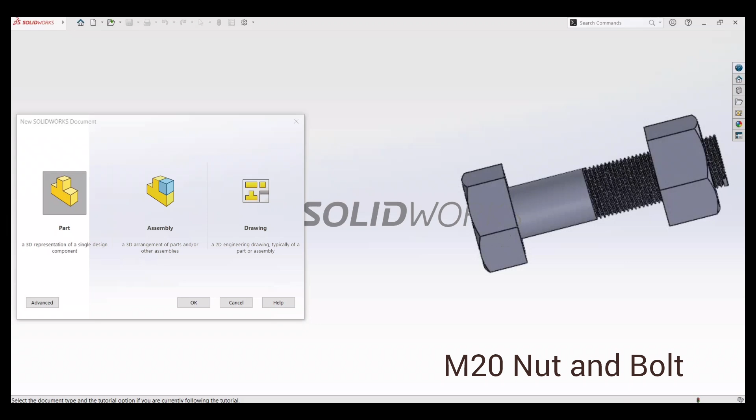Hi everyone. Today we are going to discuss the nut and bolt assembly. For that, we need to open the part drawing. Click on OK.

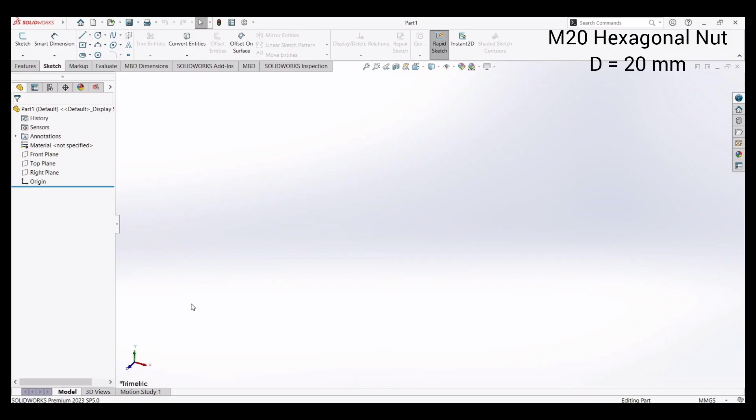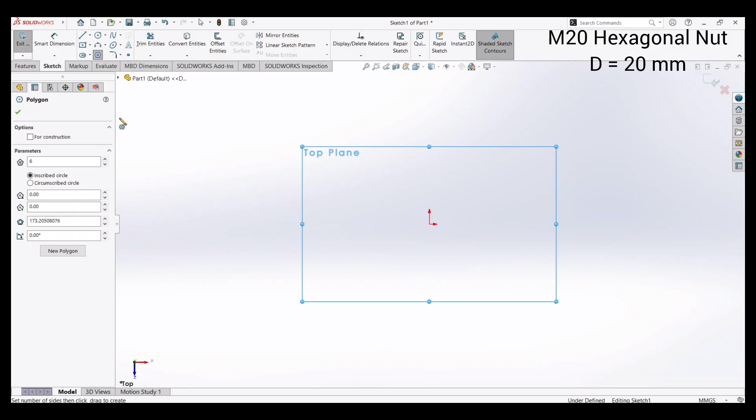Here we are drawing an M20 nut. For that, we need to select the top plane. Then on the basic modeling tools over here, we click on the polygon. Now we go here.

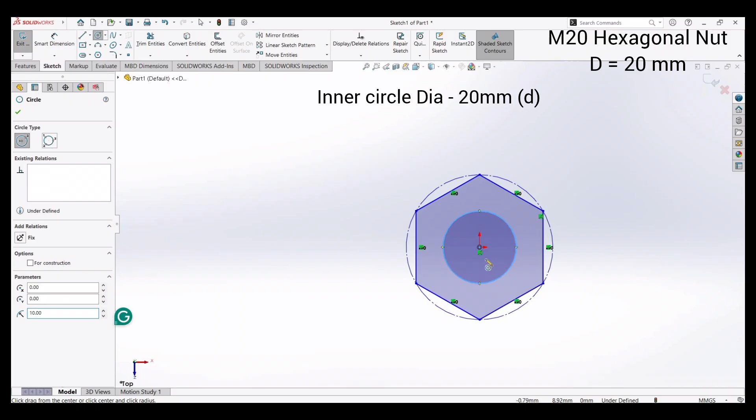We need to click on the circumscribed circle. The circle dia must be 40. We need to draw the circle of dia 20, so the radius will be 10. So this circle dia will be 20.

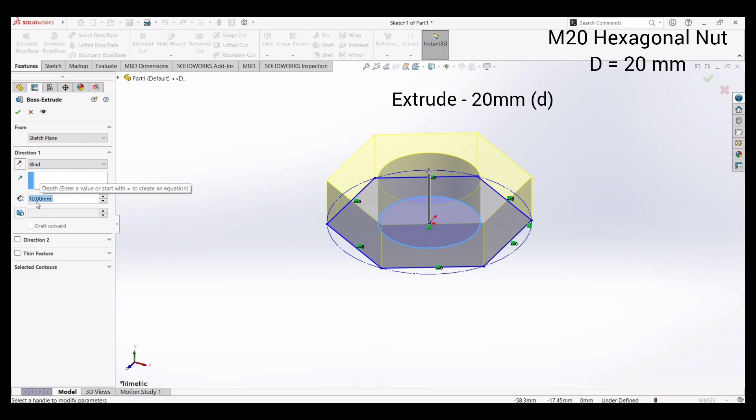Click OK. Then on the basic modeling tools over here, click on the extrude boss base. You can see here, and the value will be 20. Click OK.

So this is the basic drawing. Then we need to chamfer the edges. For that, we need to come to the front plane. Make sure we can see only two faces over here. If we see like this, we need to change to the two faces direction that is available on the front view.

Then using a midpoint line, we draw a line over here. We need to make that angle 330, and we can give the distance 20. Click OK.

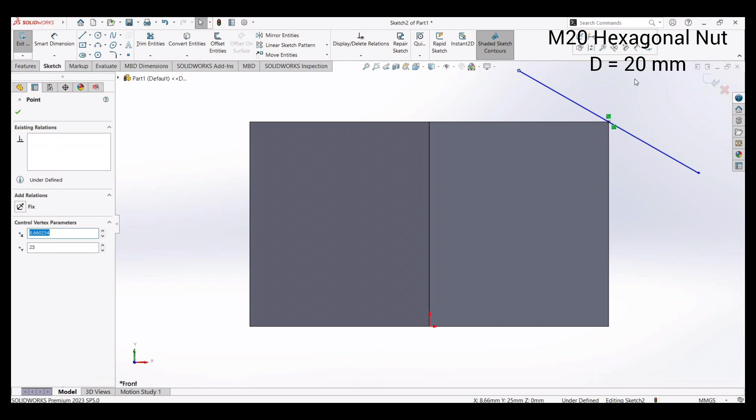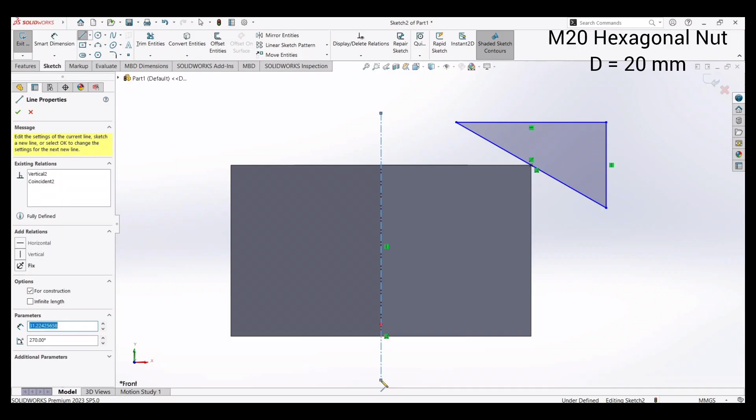And we can close. We can close this surface. Then coming to the front plane again, we need to draw a center line over here. So we drew a center line and we draw a surface over here.

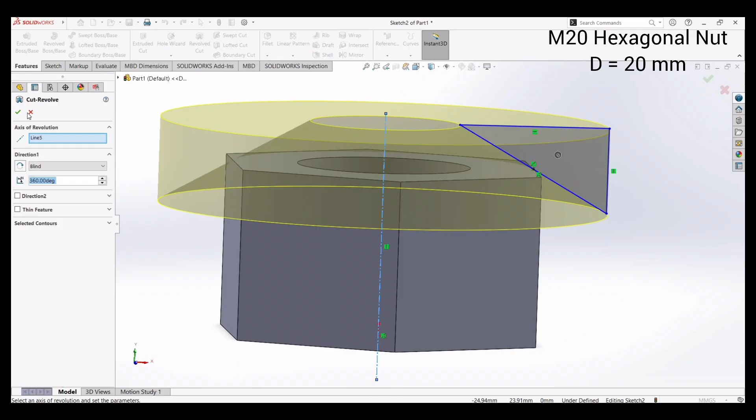Then on the basic modeling tools, we move to the revolved cut. So the axis of revolution we need to select for this line, and this thing is revolved over the nut, and click OK, and we can get here we can see that it is chamfered.

We need to save this as nut.

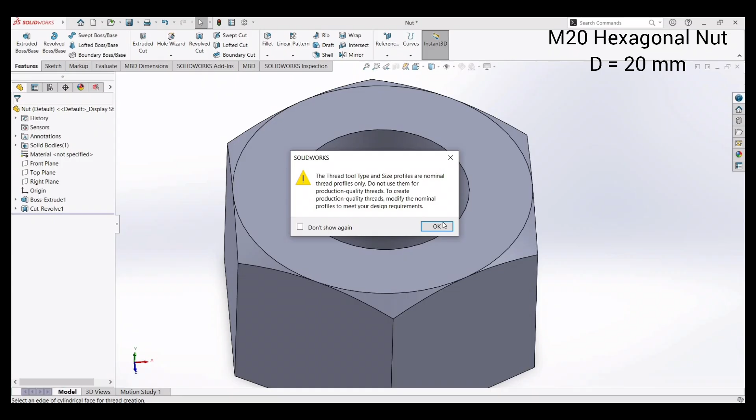And we need to give the thread over here. For that, we take the help of hole wizard thread. So this is only for the study purpose. For the production quality thread, we need to create the thread in another way.

For that, we need to select the edge of the cylinder. For that, we can click it here. You can see the thread moving down over here. And the distance here, the distance is only 20.

And we need to select the metric thread 20. So make sure that the dia is 20 over here. And the pitch is 1.5. Make sure the wireframe preview is turned on.

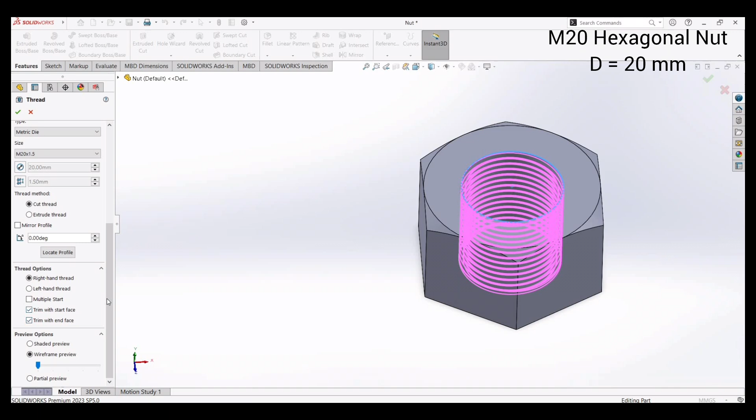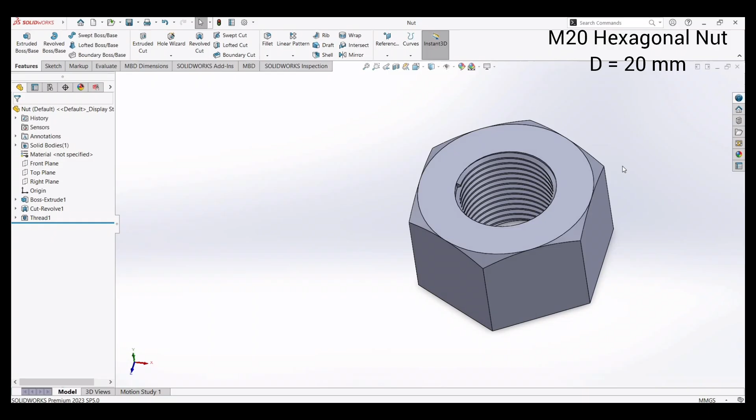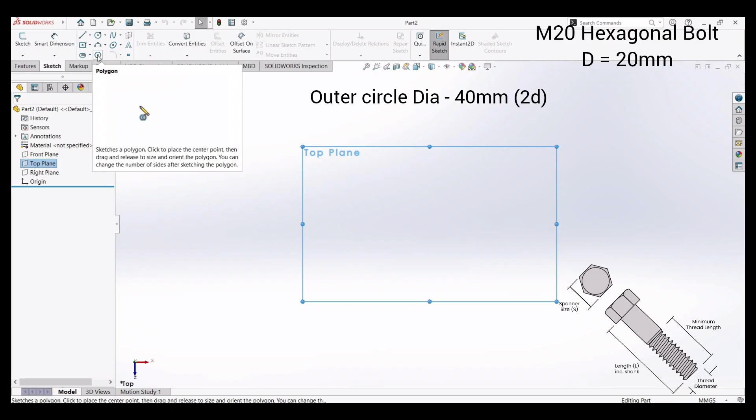Now we need to draw the hexagonal bolt. For that, we select the part drawing again. Again, we select the top plane. We select the polygon. Click on circumscribe the circle.

And here, the dia of the circle must be 40. Here it's 90 because this angle we shown here is 90. Click OK.

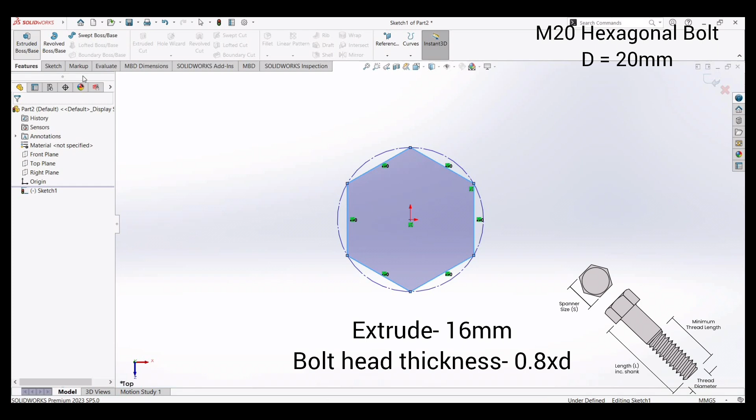We need to extrude. And here the value is only 16. Click OK. Then coming to the front plane, we take the line.

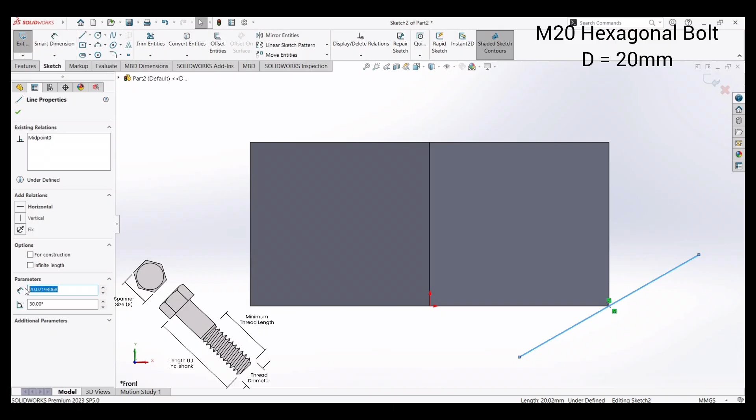Make sure the angle is 30 and the distance, you can give any distance, make that as 20. Then we need to complete this. Click OK. And we need to draw a center line.

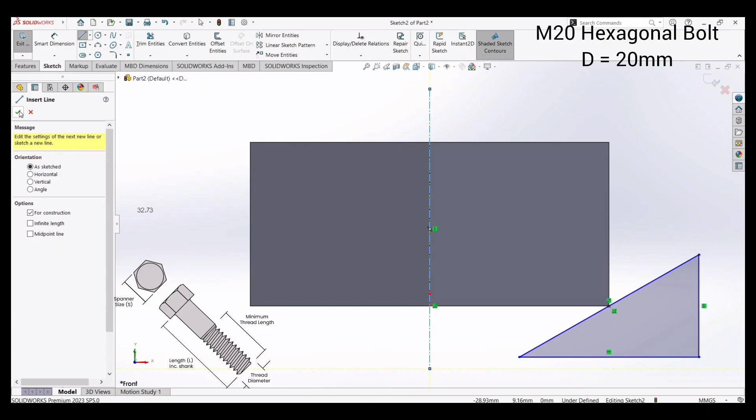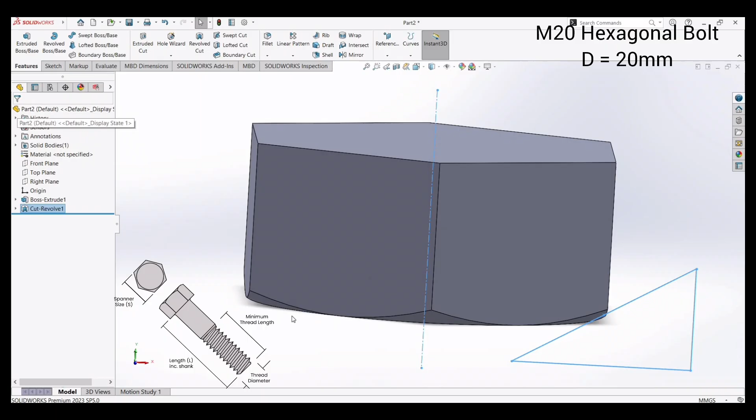Click OK. So we check. So we draw the centerline and we have a surface over here. Then we move to the revolved cut. We took the axis of revolution as this line and we can revolve this thing and cut. So we get the chamfer over here.

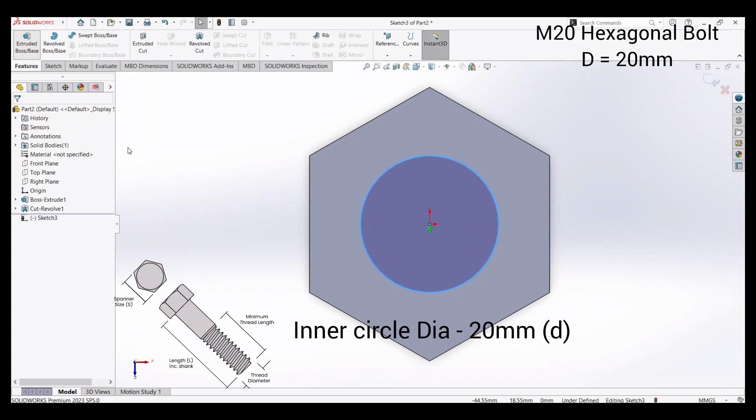Now we need to draw another circle with radius 10 or dia 20 over here. Then extrude, we can give the value around 80. Click on OK.

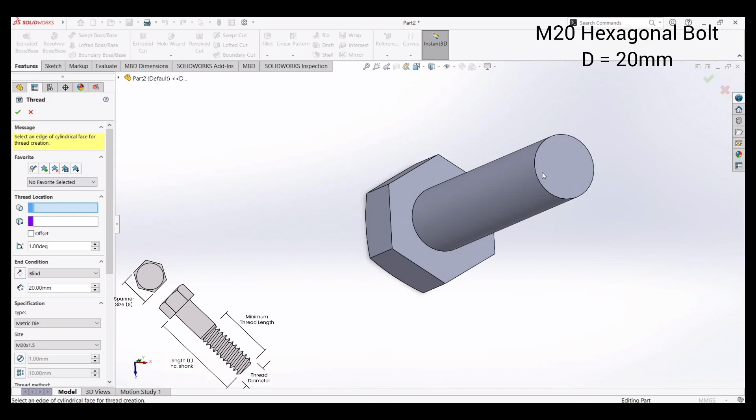Again, we move to the thread. So this is for the study purpose only. For production quality, we need to create the thread in another way. We select the edge of the cylinder and we can give the value here as 50.

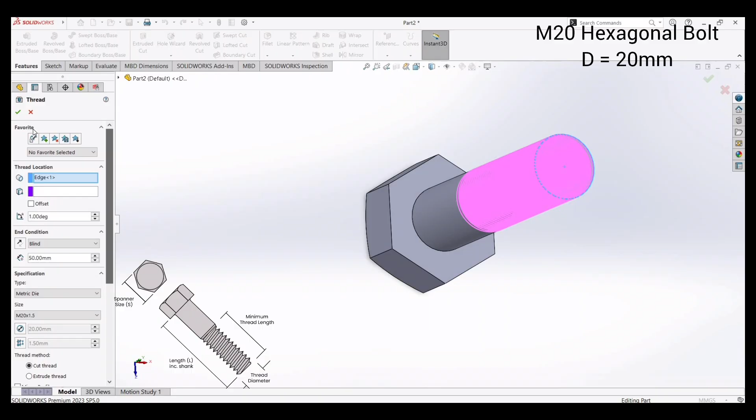Then we select a value, it is similar to we selected before, 20, 1.5. And here we select the cut thread because we can cut inside this bit. Click on trim start face and trim end face. Click on OK. So we can see the thread over here.

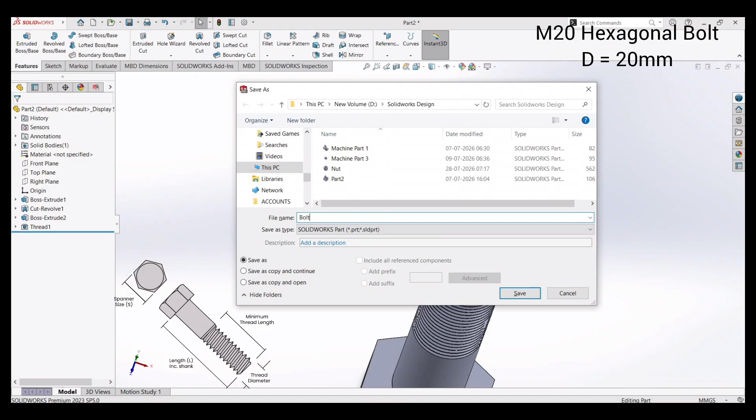Then we need to save this. Give the name as bolt. Save. Save it.

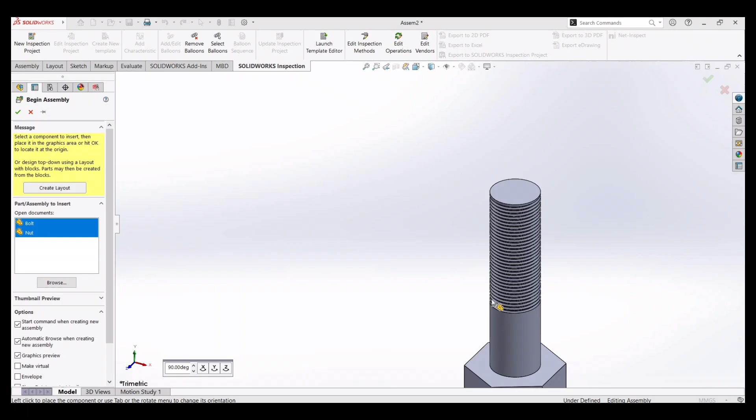Now we are going to the assembly part. Click OK. So they ask for the parts. We select the nut and the bolt. Click open. So here we can see the nut and the bolt.

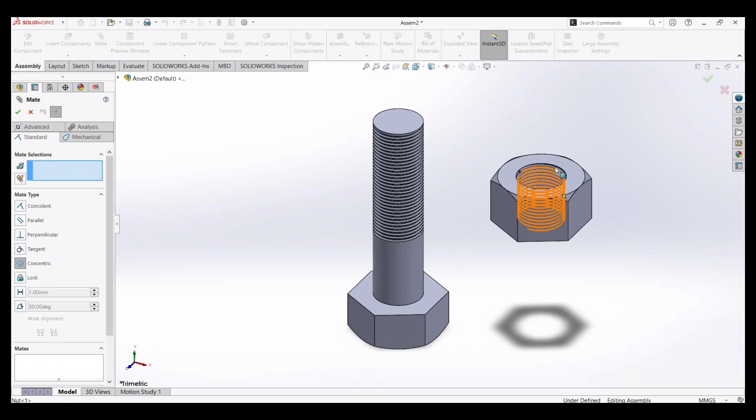Now we need to mate these options. On the assembly tab, we can see the mate over here. We can see different types of mate options over here. We can take the concentric. You can see it here.

We can do different types of lock arrangement or rotations over here. We can even rotate or change the alignment over here like this. So there are different options over here. Click on OK.

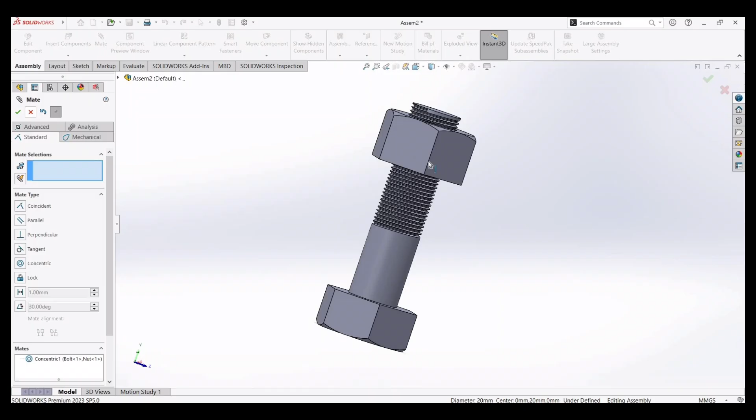So here we can see the nut and the bolt assembly. Then we need to save this assembly.

As assembly, nut and bolt assembly. Save.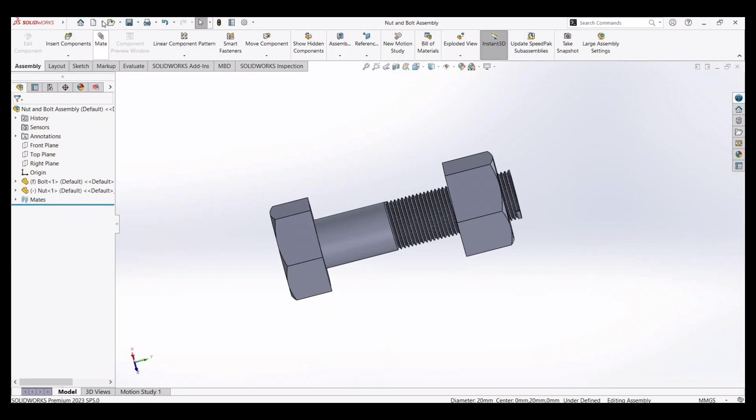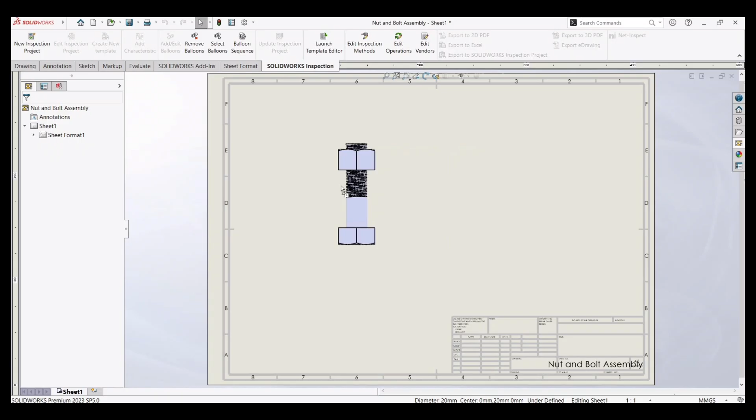Then we can move to the draft. You can see the options here. Click on OK.

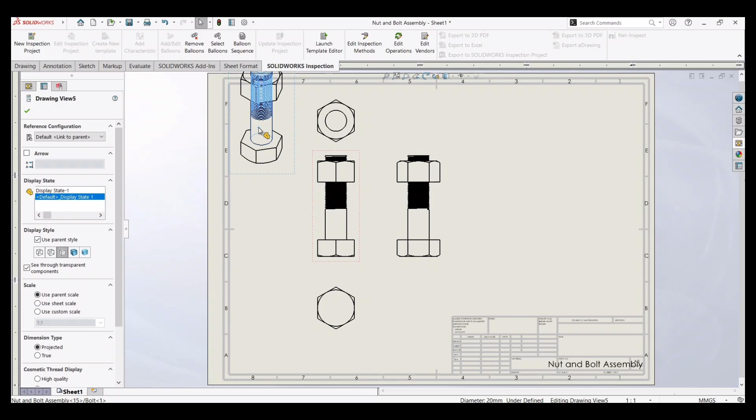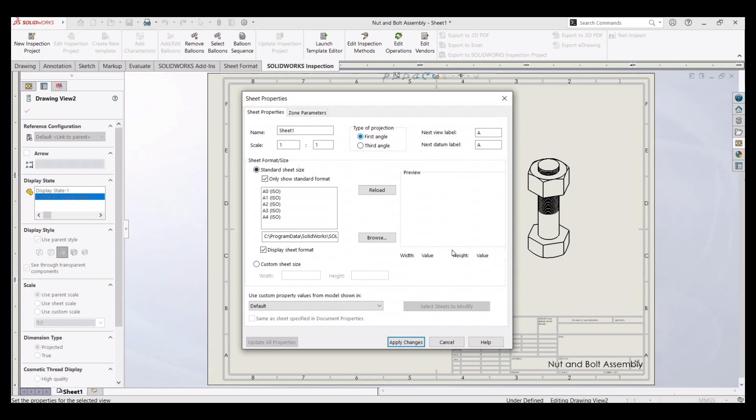We can arrange the projections. We can move the projections over here. Make sure on the properties we can see it in the first angle.

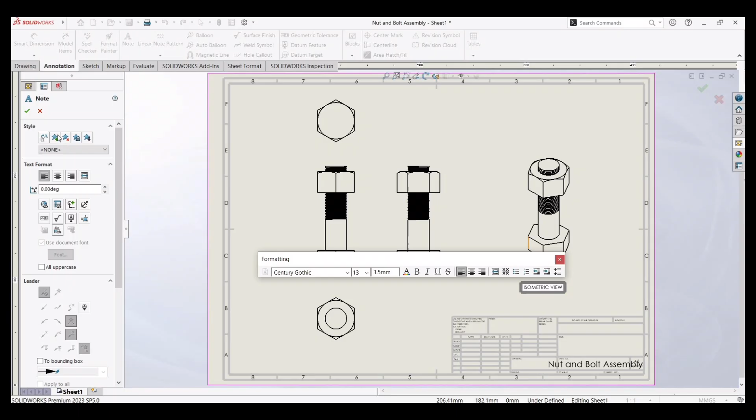We can give the note. Likewise, we can write the front view, side view, top view, bottom view over here. And we can give the name over here.

Front view. And this is the top view. And this is the other view. You can give the names. And you can do the dimensions.

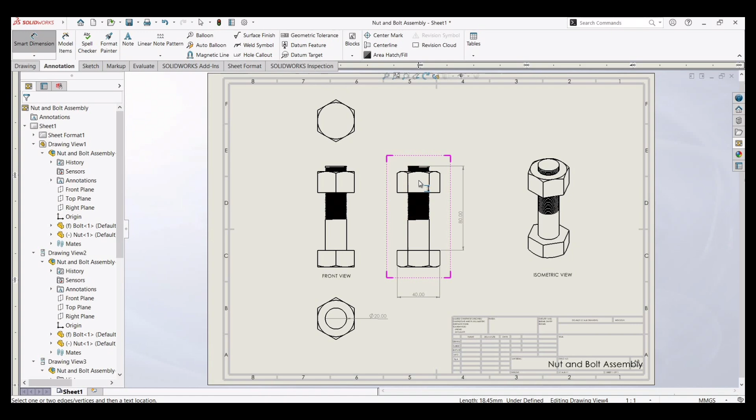So these are the different dimensions. So these are the main dimensions and give your name.

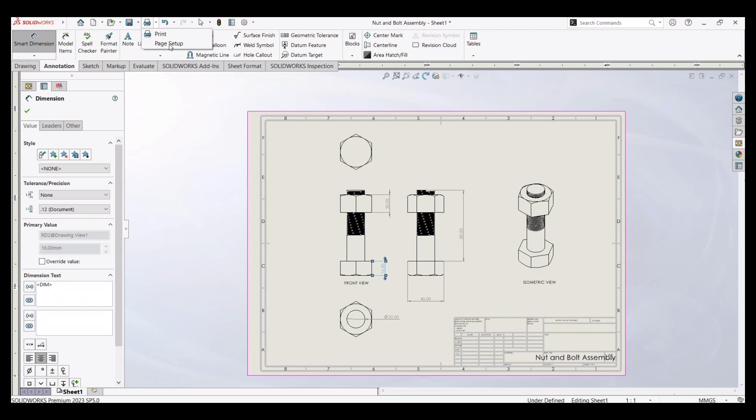Then we can show the page setup is on A3. You can see the preview over here. Then click on print. OK.

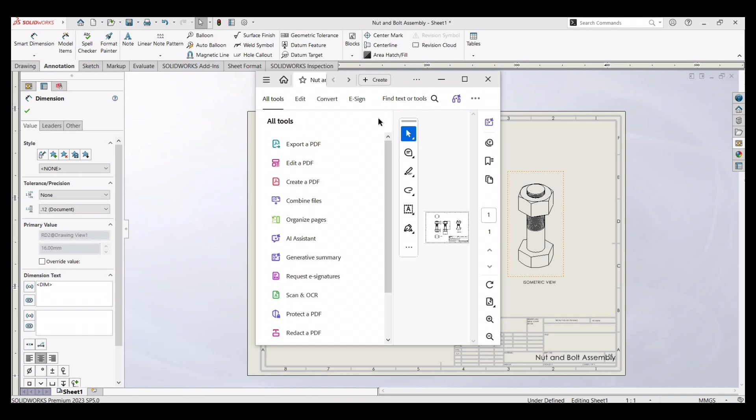Nut and bolt. Thank you.